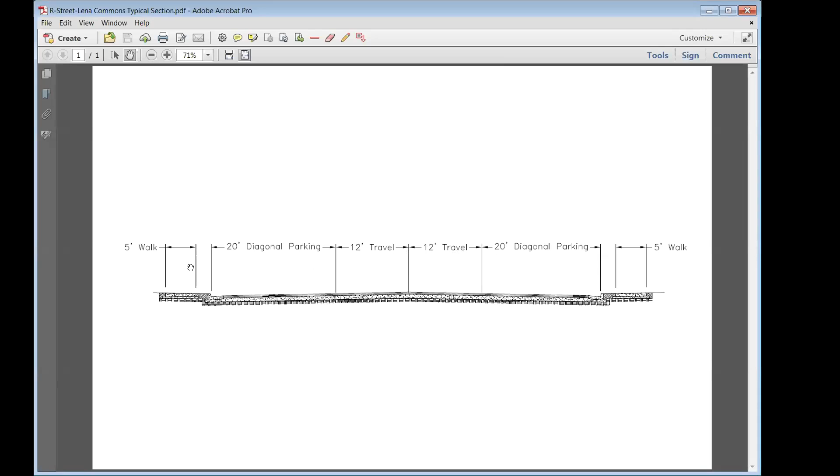Okay, this is an overview of what the cross section will be. The right of way total width is 80 feet. So down the center, we're going to put two travel lanes and then two diagonal parking zones on either side, and then 5-foot walks on the property line or close to the property line on the Lena Commons side.

The back of the sidewalk will be right against the property line. On your side, the west side, there'll be a 1-foot setback for the sidewalk. In other words, the back sidewalk will be 1 foot off of the property line into the town right of way.

This is a drawing, well actually the model I work in, and we'll zoom into it down here at the bottom. It's Charles Street at the south, Fredrick is here, and Otto is towards the north. So it'll be basically two blocks.

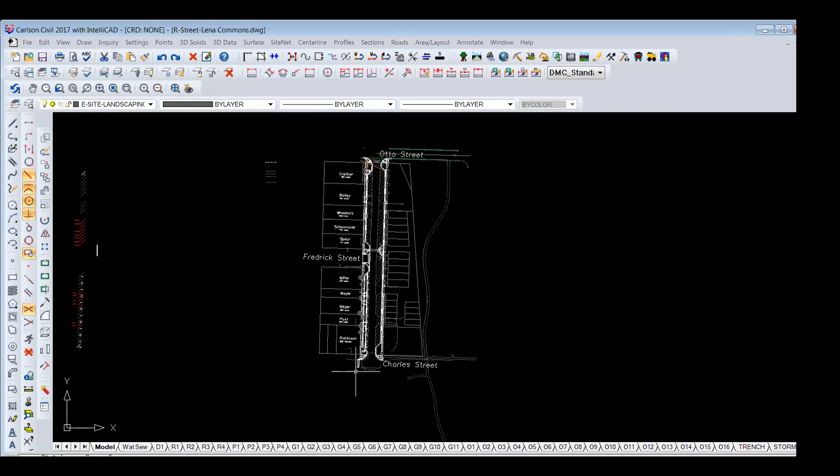Now if we zoom in here -- hey, this is Preston, let me interrupt real quick. Can everyone see the screen first of all?

Let's see some nodding heads if that's true. Ron, I think you really need to speak up, we're having a hard time hearing you. I'll get right in front of the mic, I hope that helps.

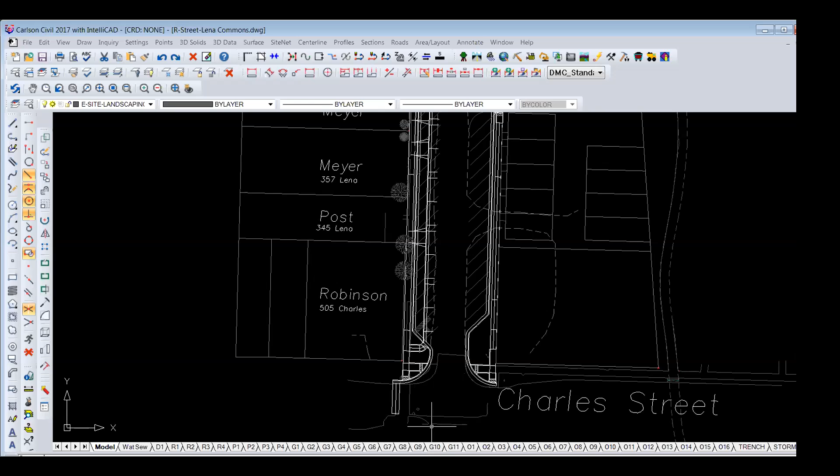This is Charles Street. We're going to replicate what we've done downtown and put bulb outs on all ends of the blocks with the handicapped ADA ramps that approach from either side. This corner over here is the Lena Street Commons.

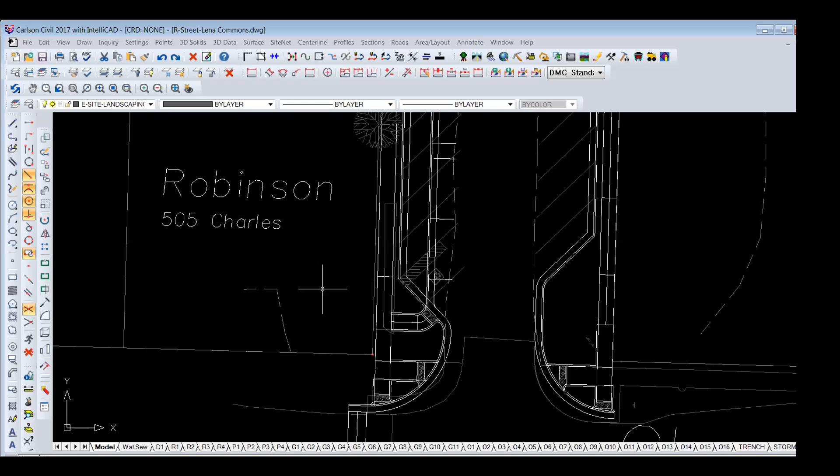This is the vacant lot owned by Robinson. This little gray line here is the existing sidewalk, and that sidewalk will come out, replaced by a new sidewalk lined up with the ADA ramps.

At each end of the westerly block, at Otto and at Charles, we will have 2 handicap parking stalls. For each, there will be a ramp that allows people to get out of the handicap stall and up onto the sidewalk. Diagonal parking continues down the street.

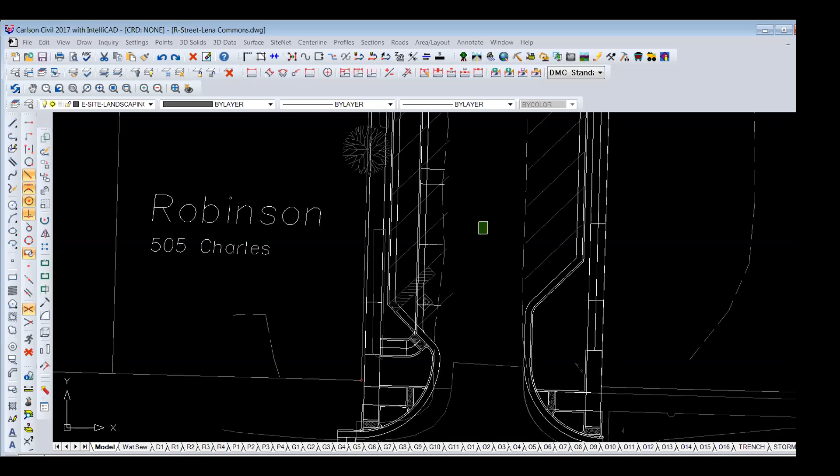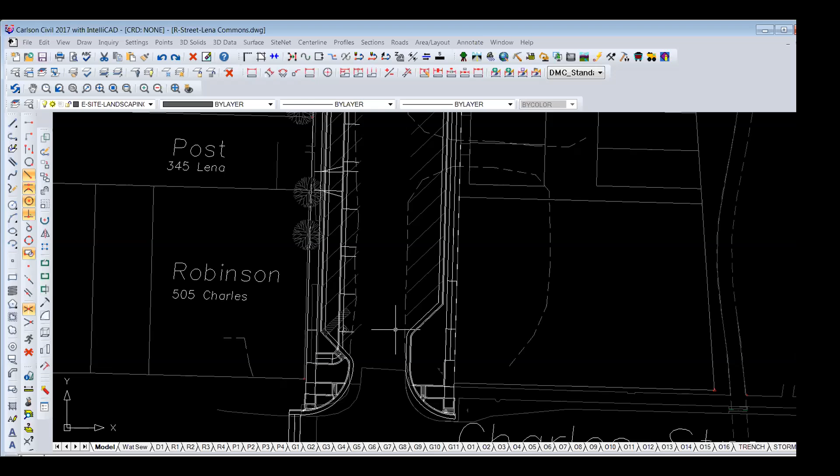On the other side, on Lena Street Commons, the bulb out goes a little bit further. This is to allow a car parked in this stall to back out without backing into the crosswalk area. That's why the bulb outs on this side are longer, to have a safe area for someone using this parking stall to back out without hitting pedestrians.

On Robinson's property there are 2 trees. They're not beautiful, but they are trees. Unfortunately, they're right in the sidewalk area, and if we put the sidewalk in, the roots will lift it. So we'll probably have to remove those 2 trees and do something else there.

Once we get past that, starting on Post's place, there's a large pine tree and another 2 small trees, all right up against the fence, but they're far enough back that we won't need to deal with them.

Same with the Miller property, there's a large tree and a smaller one on either side of the walk that goes into the front door. Both are out of the way enough that they won't be impacted by the project.

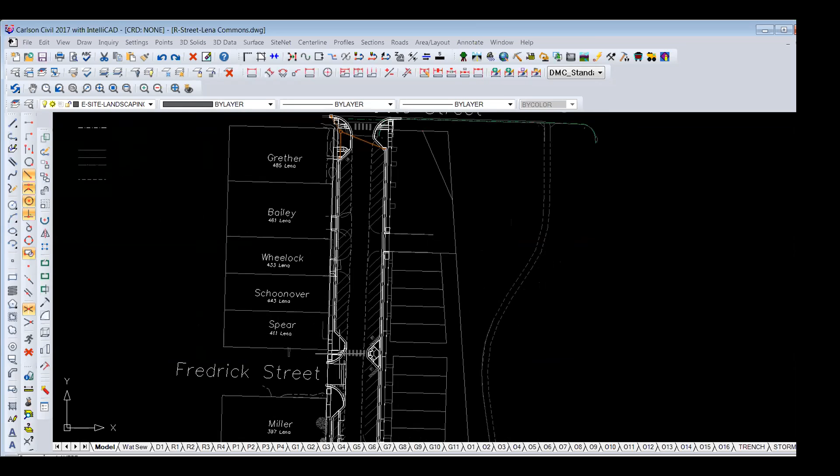Once we get to Lena Street, or Fredrick Street, we reach the Spear property. I'll zoom in a little here. This is the front sidewalk of the Spear property where it comes out into the right of way, about 2 feet. There are 2 bushes on either side of their entry sidewalk that'll have to be trimmed back significantly or removed to accommodate the sidewalk installation.

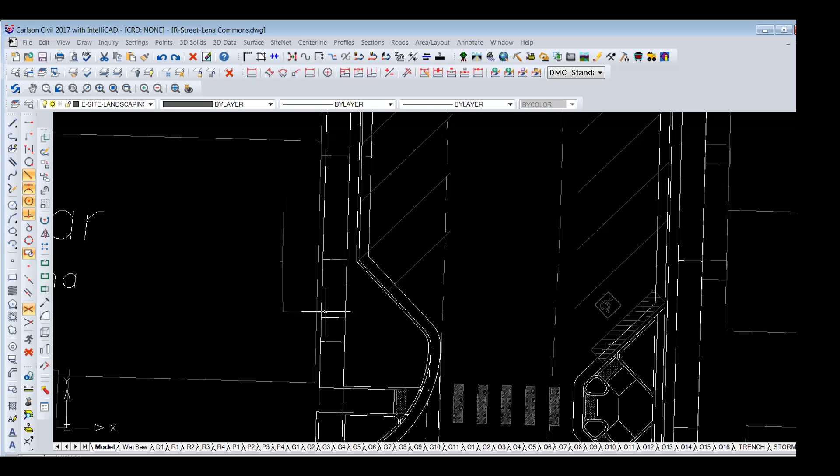Going further north, this is the Schoonover property, and there's no vegetation there. He does have some parking, where he parks the Model A, and on the north end he has a shed, and he does use a parking stall there.

But the fence is close enough to the back of the sidewalk that it doesn't allow sufficient distance. If we leave that as a parking stall, he can't drive in and park completely off the street on his property without partially parking on the sidewalk.

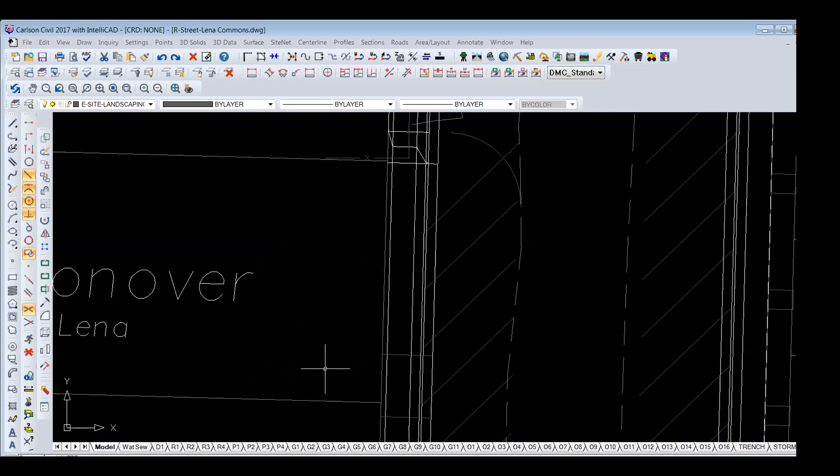Is that a little better? A little closer? Not much. Why don't we take a minute and go back into your control room? Joanne, I don't think we caught what you said. I think you guys need to get much closer to the microphone or just project. If they can blow that screen up too, so it's bigger, that would be great. That whole window, that opened screen doesn't have anything on it. Well, the one behind that one. Yeah.

Maybe what we should do is call. Joanne, Ron, are y'all still there? Yeah, we're trying to make the microphone louder, we're looking for the thing in the control panel. As an alternative, you can always dial in and use audio that way. That's what I was thinking. Okay, yeah.

Well, how are you, Sherry? Oh, we're sitting here waiting. Can't hear you. Oh, sorry, was there you muted? Hi, Ken. How are you? Good, I'm good, thanks.

You can still see out your front window now? A little bit, well, not for long now.

And we're looking at a gray box on the screen. I don't know if you're trying to say again. Does that work? There you go. Yep, there you go. Okay, here we are. All right, sorry about that. Now can you blow up that whole pane there, you've got, enlarge it? Use that little green button. Does that give you any more? That's probably all we're gonna get, yeah.

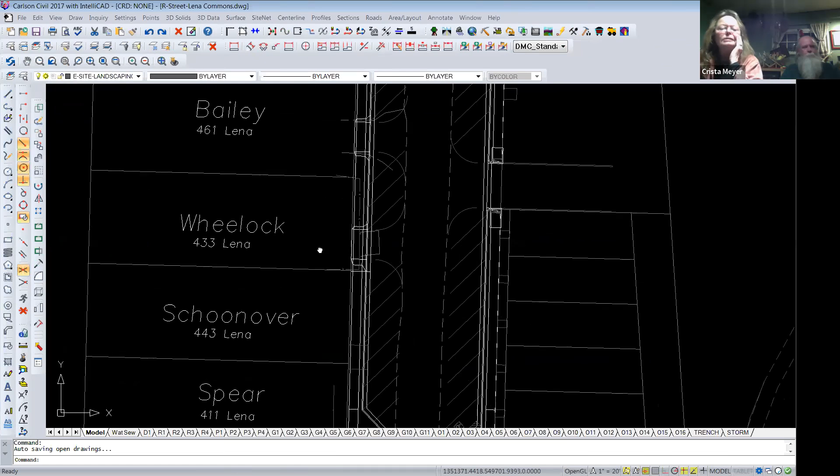Okay, I think we need to go back to the Spear property. Or the Schoonover? They're not on here, but okay, you're gonna have to remove some bushes or something out in front of their house, Sherry. Okay, well, we'll go by Schoonovers.

One of the things to have a driveway cut is that we need sufficient distance behind the back of the sidewalk and into the property that somebody can park a vehicle without the back end sticking back over the sidewalk, so the sidewalk is free for pedestrian travel. So when we laid out where driveway cuts go, one of the things we looked at was whether there's sufficient distance behind the sidewalk that a car can actually park.

The Wheelock property has a steel fence out in front of it, about 4 foot out into the right of way. That fence will have to be moved back to the property line, but they have a driveway that goes back to the house with adequate parking, so we provided for them to have a driveway access cut that crosses the sidewalk to get into it. There's no diagonal parking where that driveway cut is.

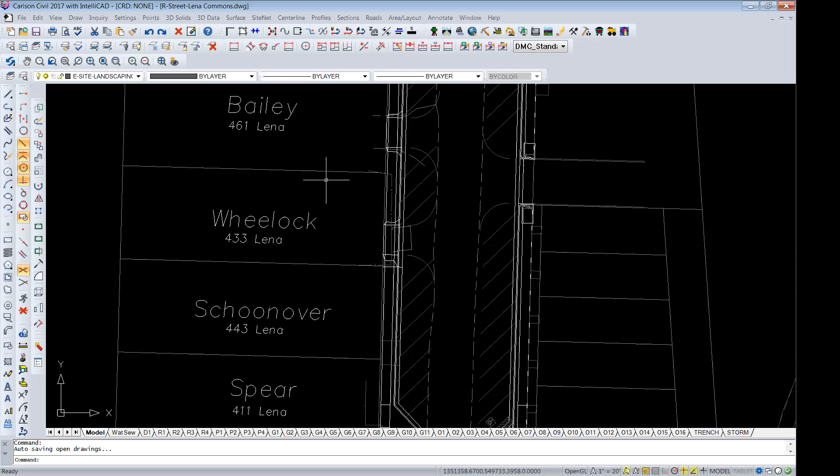For Schoonovers, there wasn't enough depth. They have a fence somewhere about in here. It was only about 14 feet from the back of the sidewalk to where they could park. Most of the parking they're doing now is actually out into the right of way.

On the Bailey property, the driveway is sufficient, so there would be enough area to warrant having a drive-through or a driveway parking and have parking off the street. So that has a curb cut in front of it. It still has some street parking in front of the property, but it does allow for a parking stall for somebody to drive into the parking area on property.

And then the Grether property just put a fence at property line, and all of their improvements are on their own property, so we won't impact that. Again, there'll be an ADA ramp up here at the very north end near Auto, and an ADA ramp that somebody can use to get up onto the sidewalk from the ADA parking.

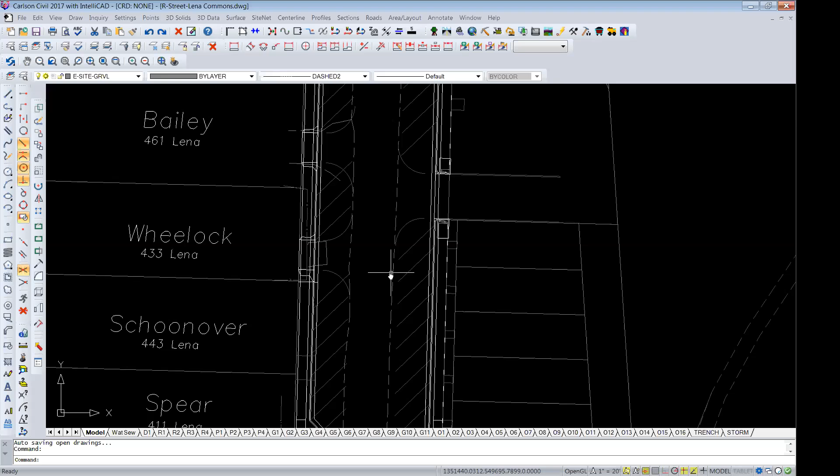So all of these are diagonal parking in front of Lena Commons. There's 6 or 7 on ADA parking, diagonal parking there. 2 diagonal parkings in front of Wheelock. 1, 2, 3, 4 in front of Schoonovers. 3 in front of Spear.

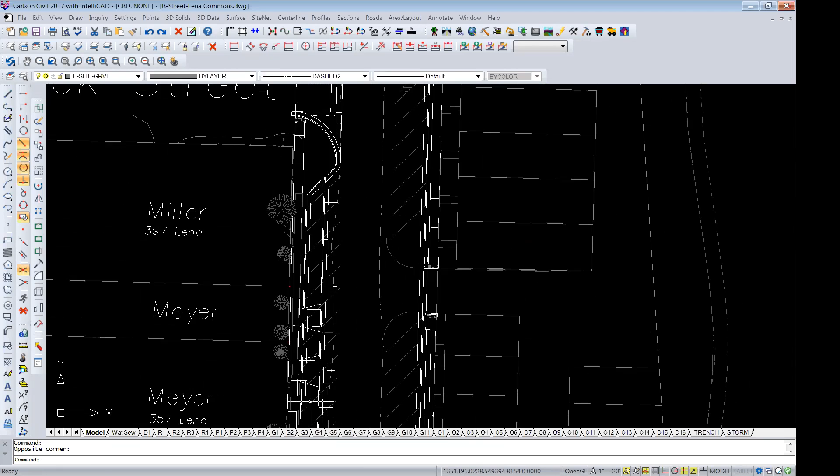Down here in front of Miller, there's 4 on-street parking. Meyer has 1, 2, 3, 4, 5, 6 parking stalls. We need to talk about that. Post has 3 and Robinson has 6. So that's the current design.

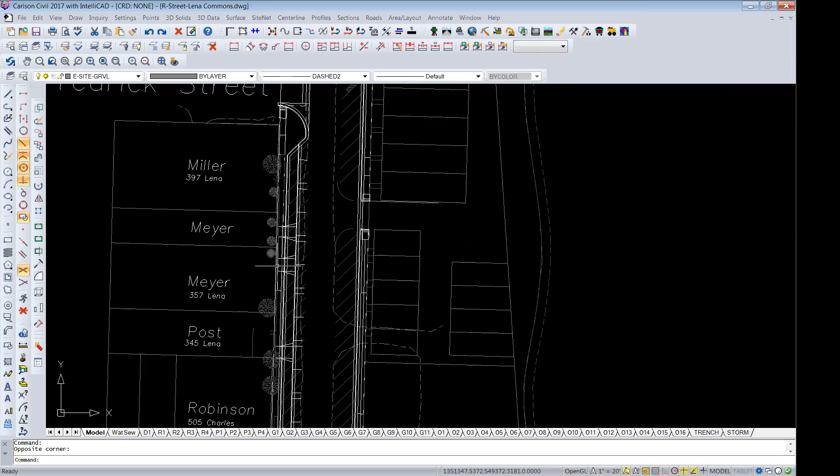On Myers and Posts, when we talked out in the field, you said there was some driveways. On Russ's, there's one into that lot that's split off to the north of the property, north of the house. Then this is the property, the lot with the house on it. And there were wooden gates here next to the tree, in between the walk gate and the pine tree. So I put in, if that goes back far enough that there could be parking on private property, I kind of drew in what a ramp would be.

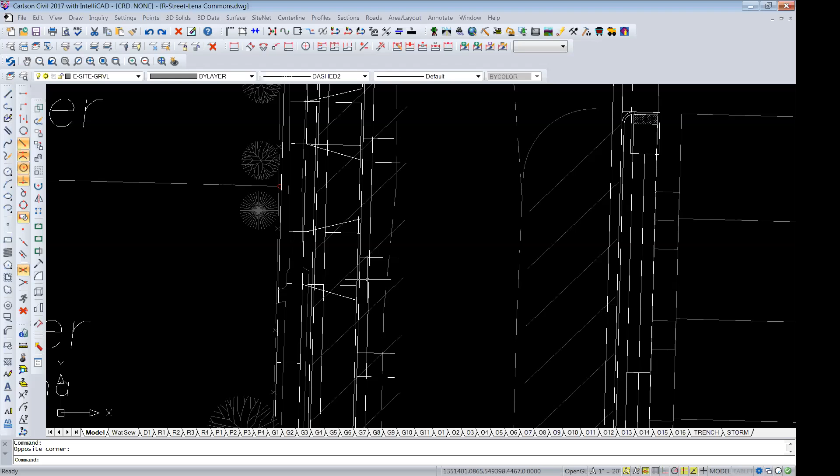To make that work, we would have to move the curb out away from the sidewalk. We'd leave the sidewalk at property line, but I need more distance to make up the elevation between the flow line and the sidewalk to make the grade. So if we put that driveway cut in, we would have to remove the diagonal parking in this block and put in parallel parking. That's what these lines are, parallel parking layout.

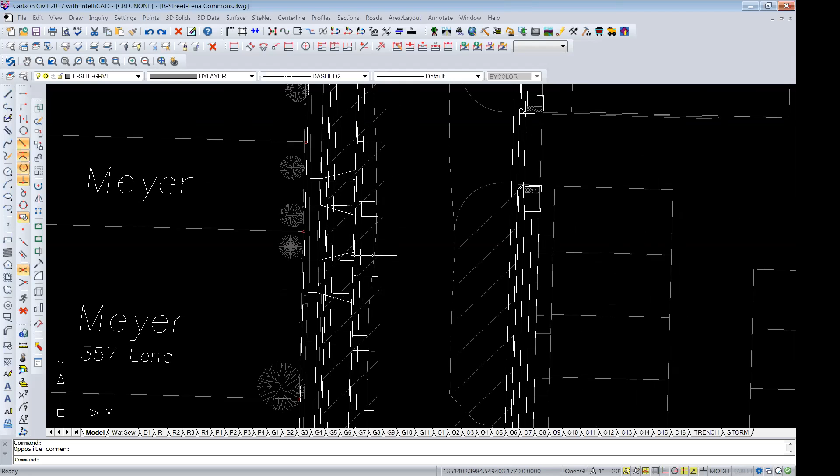But to have this driveway cut, we'd lose 2 parallel parking spots. To have this one, we'd lose another one. So there would be 3 parking stalls of parallel parking lost.

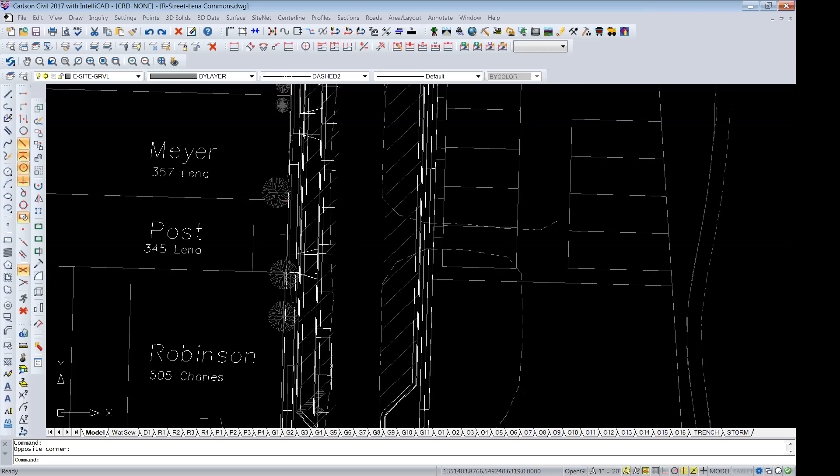And then down at the posts, we would lose 2 parking stalls in front of the post property. So this would be about the only area we could keep: 1 in front of Myers, 3 in front of Robinson, and 2 in front of Miller's.

Let me interject here, if you can hear me. We were never in favor of diagonal parking on our side of the street, because I measured the street and it's no wider than the street at the library, whatever street that is, going east and west. And that street's barely wide enough when you come around the corner, with parallel parking on one side and diagonal on the other, to get two large vehicles through there.

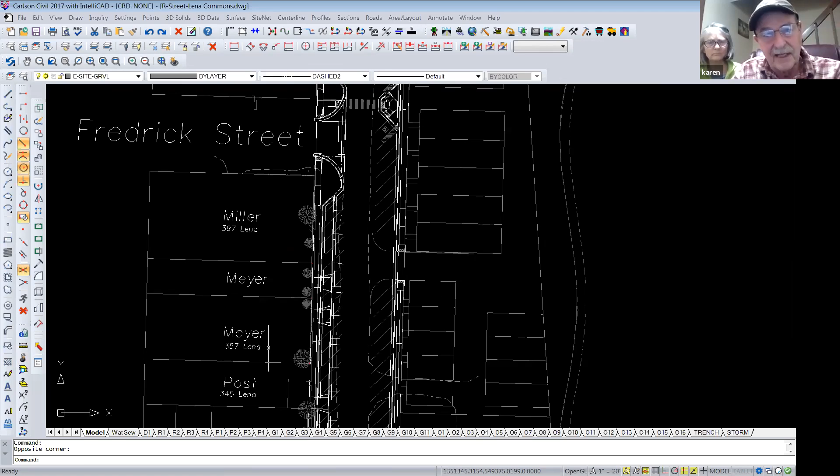Yeah, this is the same thing. The difference, Ken, is that Lena Street is actually an 80-foot right-of-way, and Charles is only 66. Right now, the roadway is only occupying a pretty small percent of what the town right-of-way is. So technically, there is room for diagonal.

One of the directions in 2017-18, when we were designing this, was to try to optimize the parking and to mirror what was on the rest of Lena Street. I think if all of you prefer that block be parallel, that would be something we could ask council about. We've got a 7th council member who can weigh in.

Well, just speaking on our part, I'm in favor of parallel parking on our side of the street, because that's what I'm gonna do when I've got trailers and stuff like that to park there. I can't park diagonally. Frequently I park a horse trailer out there, or a fifth wheel temporarily.

Is that bulb-out going to affect you for parking that trailer, that bulb-out up at the north end? It's in the way.

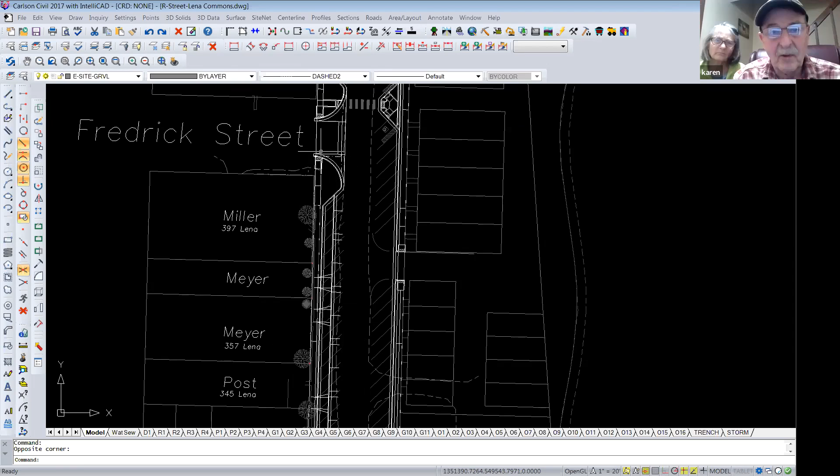Well, the bulb-out needs to be there to protect the ADA approach ramps and to make the drainage work across the street. The bulb-outs are designed to shorten the distance where people cross the street, so that they're only walking across the 2 travel lanes and not across the parking and travel lanes. That's why we have bulb-outs in the project, is to shorten the distance for pedestrians to cross the street.

Yeah, and they just make it a pain in the butt to safely get around, to turn left when you've got a big trailer or a truck, to get around those on the street.

We widened these out to 20-foot radiuses and actually put 14 feet between the lip of gutter and lip of gutter. I did that intentionally, just in case somebody did get into this area with a trailer, so they can get around the corner. If we tighten these radiuses up on the fillets to 5 foot or 10 foot or something like that, that would restrict turning, and you couldn't get a horse trailer or anything around this corner.

But the object of the bulb-outs is to bring the drainage out where it can cross at the bulb-out on the north side, and then to have the bulb-out go out far enough that pedestrians are only walking across the 2 drive lanes to get across.

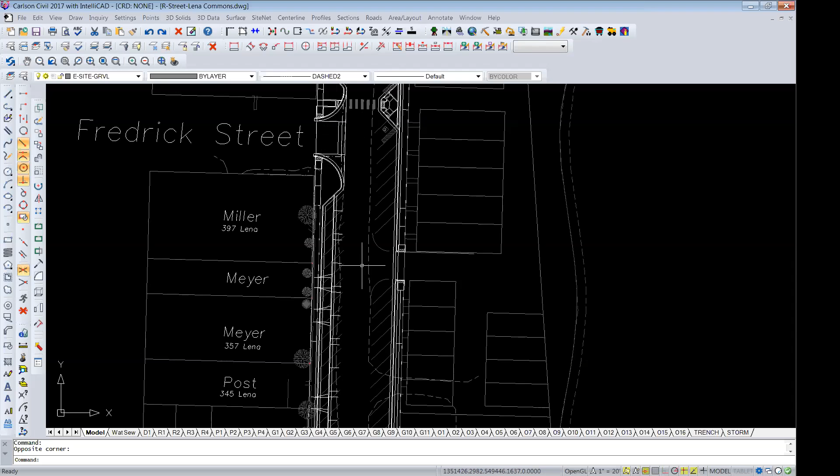Well, everybody just uses the street for a sidewalk now anyway, so it really wouldn't matter.

Well, that's part of the intent of this too, is to make it so that we have a pedestrian walkway that is not out in the street. And anytime you're putting in pedestrian sidewalks, lining them out and making them ADA accessible, the intent is to get people to where they're actually walking on the sidewalk and not using the street.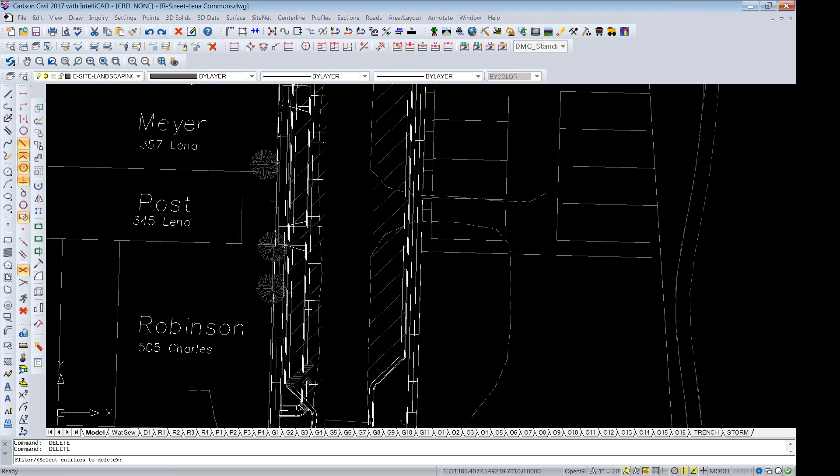I missed something when you were coming by. This is Ken Meyer coming by our house on the bushes and the trees. Are they out of the way from your sidewalk? They're far enough back. This is your walk going into the house, right over here. Maybe I can zoom in just a little bit closer.

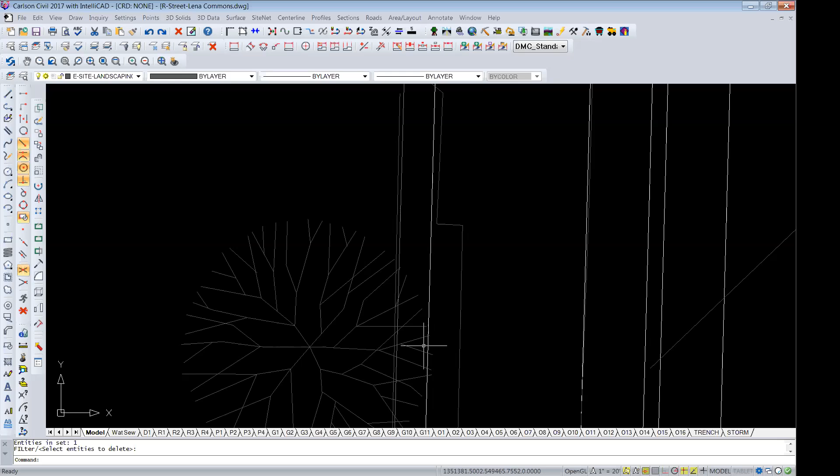This is the big tree to the north of the walk, and this is the smaller tree south of the walk. When you look at the center of this, the trunk is probably on the smaller tree, maybe a 2-foot diameter, and that's still close to 3 feet away from the back of the sidewalk. Here's the existing back of sidewalk now, this gray line on this side. So we're moving it back a couple inches right at your walkway.

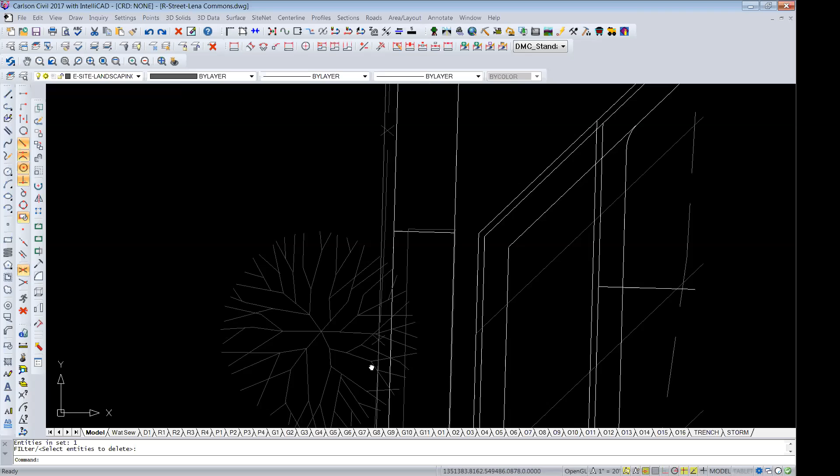So is our fence on there too? Yes, that's this line right here. And it's pretty close to the right-of-way line until you get towards the north end. This would be your fence corner. This line right here is your property line, and this is your fence corner.

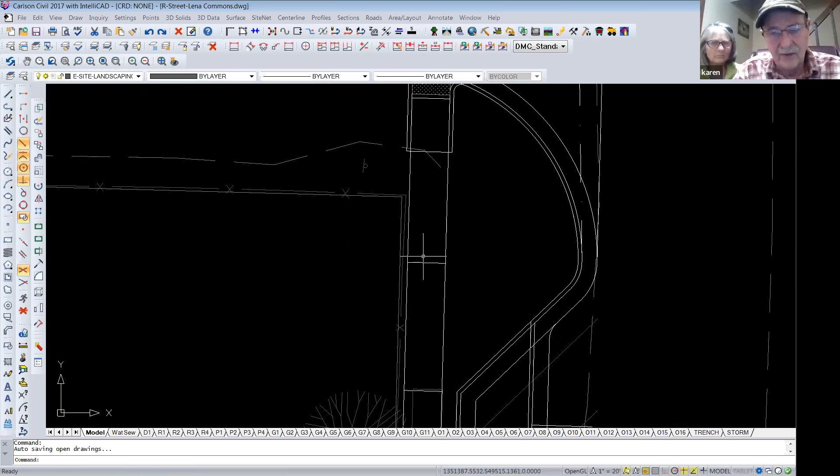And this is one of the reasons I moved it. Instead of having the back walk right on the property line, I moved it out a foot, so that we would not be getting into the fences. Okay, so do I have to move that fence or not? No. Okay, that's what I was wondering. It's been there for 80 years.

No. So, your Russ's fence, this is the big tree on the south end. This is the property corner in the fence, right in the fence corner. And it goes up, in fact all your property pins are right about in the fence corner. Here's the one, the new one that was set, that split the property. And then here's the one between Russ and Ken's. Right.

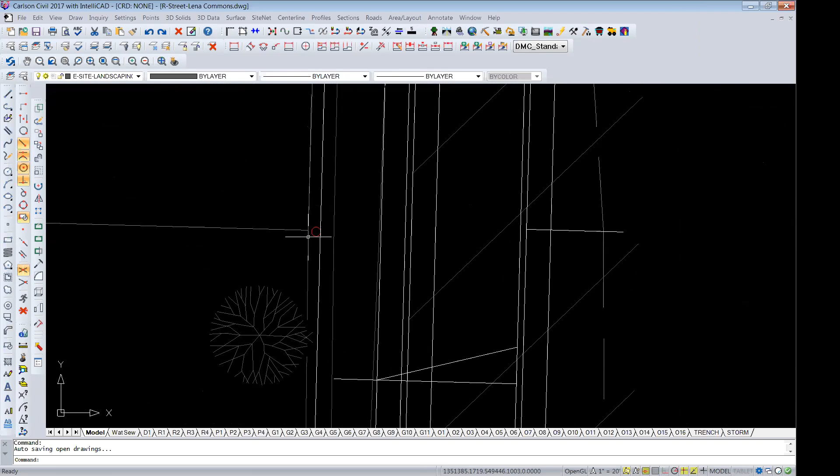And the fence is inside of that one. So, no, we don't have to move fences. The only thing we've got, the one fence that really protrudes is Wheelock's, and that's that tall metal fence that comes out and has a metal gate and then goes back in. And this is about 4 feet that it's sticking out into the right of way.

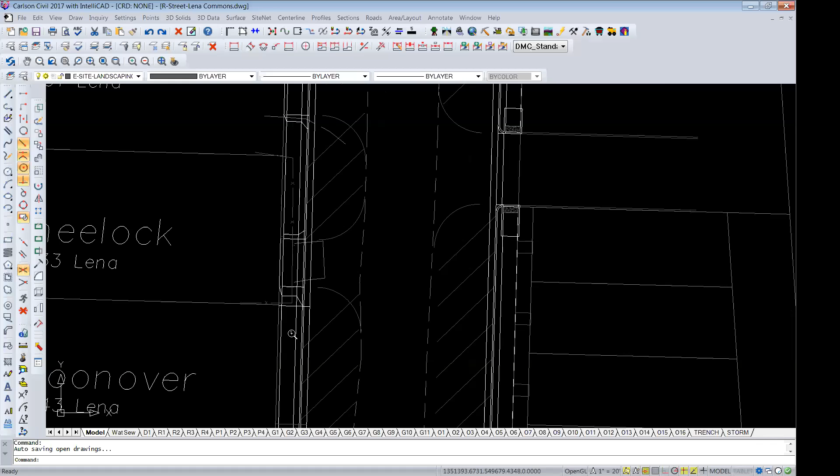I have a question about the Spear property, Cherie and Jim. They're not here, but they were talking about having a driveway to the far north of their property where they pull in a vehicle from time to time. Was that taken into account?

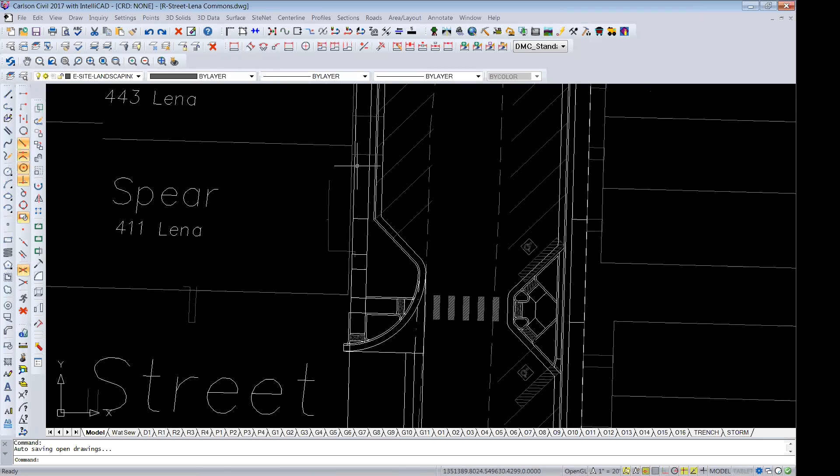Well, I talked with them out in the field. This here is their house. So they only have about 6 or 7 feet from their house to the back, well, about 6 feet from the right-of-way line back to their house. So they wouldn't have enough distance to park a car off of the street.

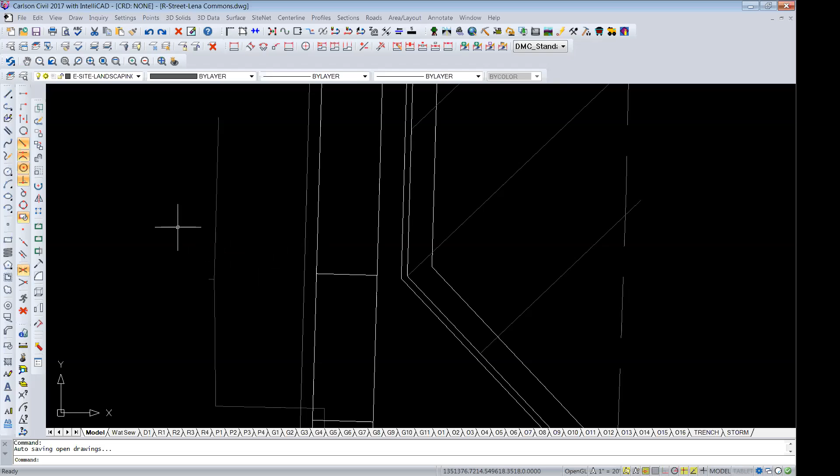I see. Okay, if they used it as a driveway, they'd be parking with the back of the car out here in the parking area. They would be crossing the sidewalk and still stop short of the house. So that didn't really give them any

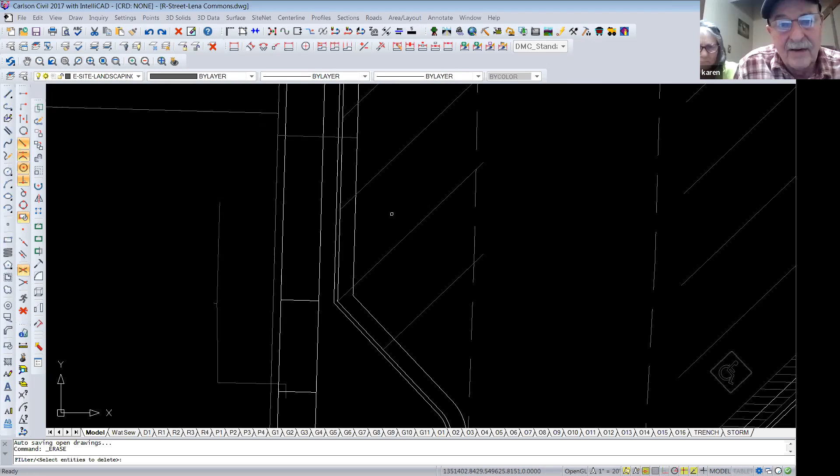availability, you might say, to have a parking or driveway cut. I think what he was more interested in was backing in over there to unload wood, because his wood shed's on the north side of the house, and he didn't want to have to back across the curb to do that. That I don't think we'd have a problem with, him backing up over the curb to unload, because he stacks his wood right over in here somewhere along this side.

And again, we have to maintain our ADA ramp or bulb-out to meet the requirements of the ADA constraints at the intersection.

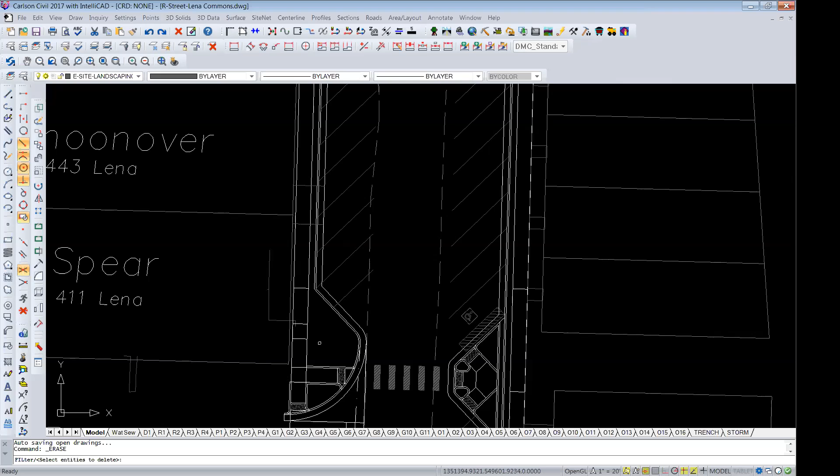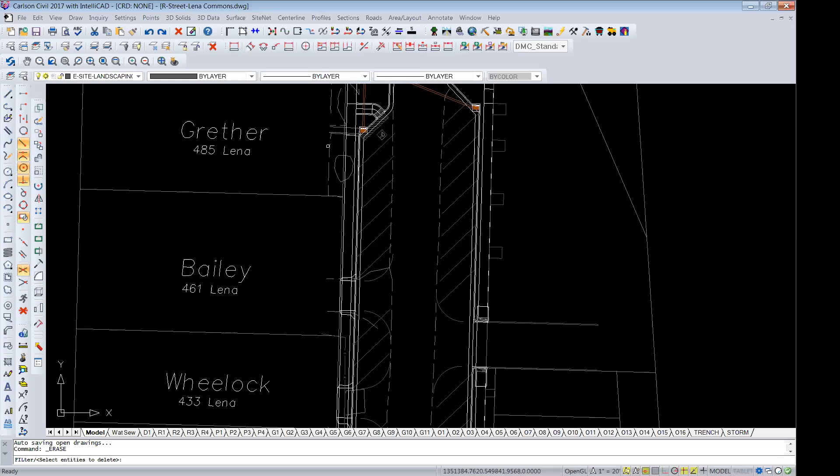Can I ask a question? About how much property are you taking from us, feet-wise, based on how the line is now? I'm Bailey, so I'm up the next property, and I know you talked about it. Okay, the Grethers just put in a fence in front of their place, and they set a pin right here at their property line.

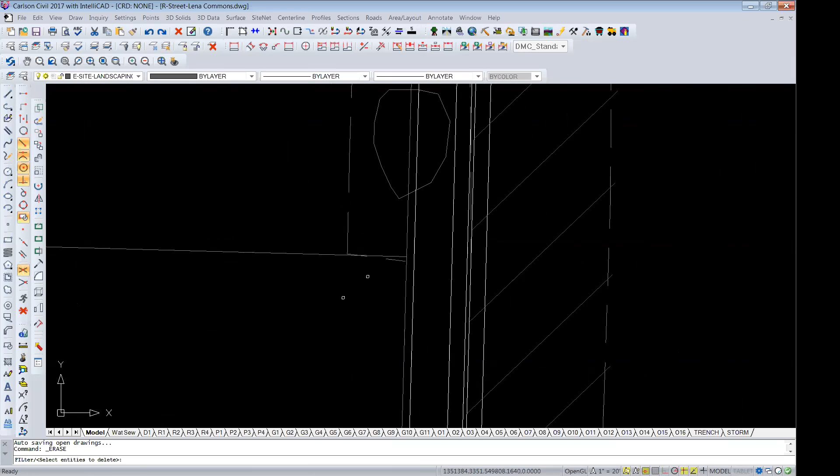And so their fence is just basically right on the front right-of-way line where it goes north. Okay, if that gives you an idea where that's at. Yes, I can use that. We're just using more of our right of way, not taking any new right of way.

And then the property directly across the street from me, which is now a vacant lot - are units going in there as well? Right now they're using it for storage.

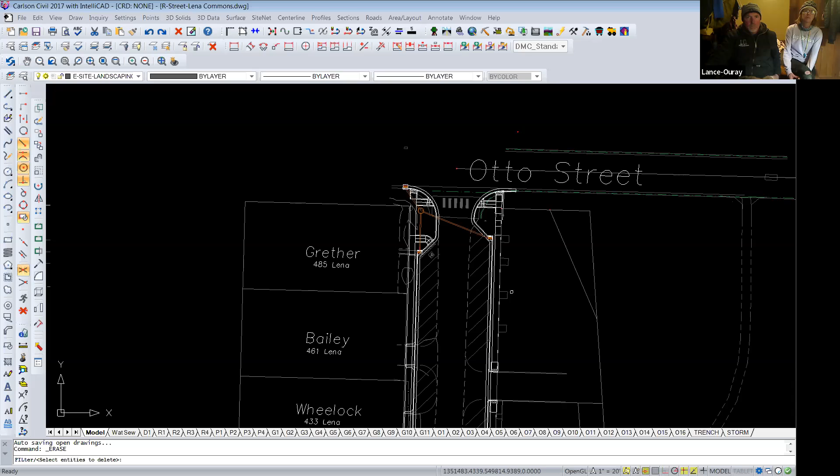Yes, this area right here, they have 4 units going in. They're small commercial units, one story. Those are the commercial, the A unit, single story. And they have very little plumbing, so they can't do a whole lot - I think there's one 1-inch tap for all 4 units.

Hey Ron, this is Lance, we're at the Post property. It looked like you had the driveway in there for us - I just wanted to confirm that.

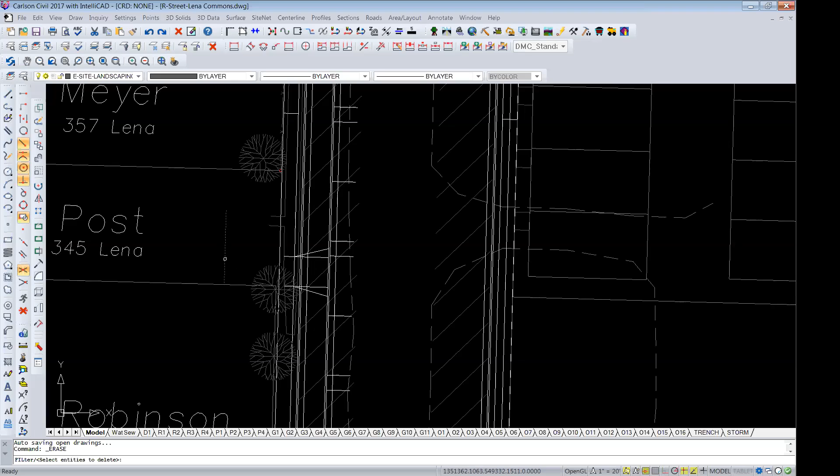The house is right here, that's what this line is. And there isn't enough distance between the back of the walk, which is right here, and the fence line. So I drew one in here, but you'd have to do something - what used to be an old carport would have to be opened up so that you could actually park in it, because there isn't enough distance between the front of what was the carport and the back of the walk.

Right on the sidewalk right now there's a driveway cut. And the carport - I actually pull a motorcycle in there, and I could also pull a Jeep in there. I own a Jeep and a motorcycle and would like to have access off the street to pull it in.

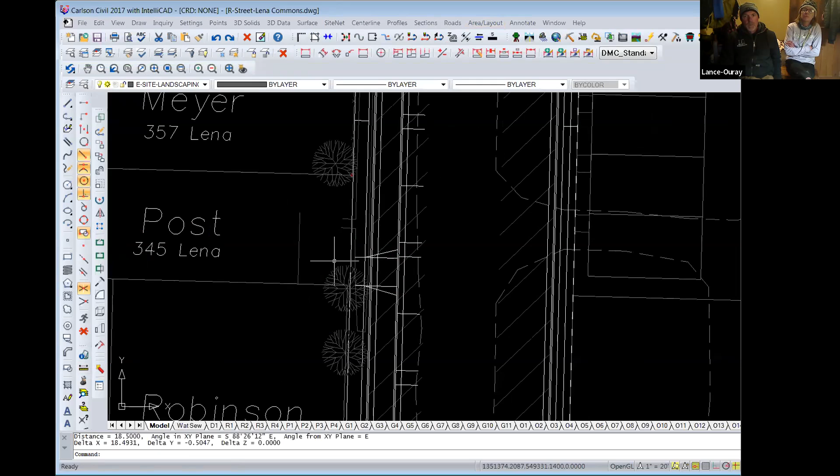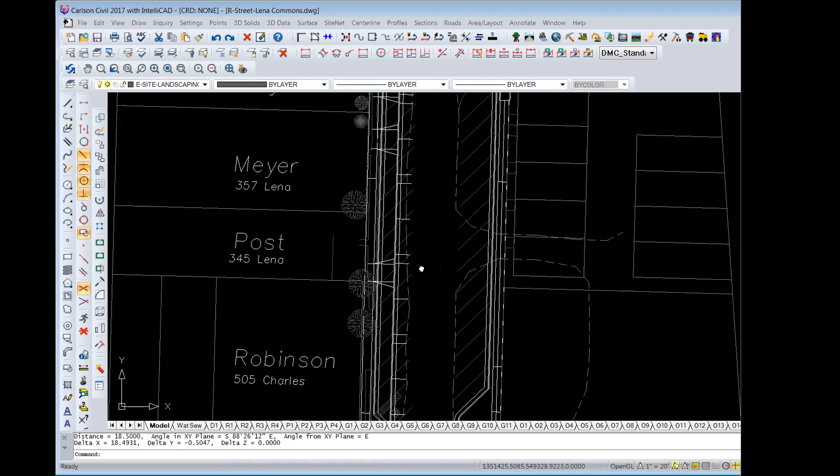Russ, do you want to hazard a guess about how council would feel about that? I would have no guess. I know personally how I would feel about it, but I'm not going to speak for council.

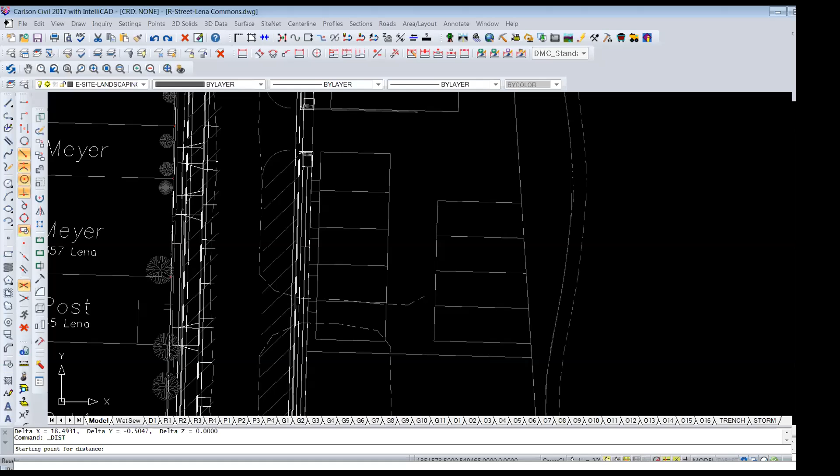Good move - what would everybody else like to see in there, parallel or diagonal? That's a good question, Ken. I think what I'm hearing is you would prefer the parallel. I think I would - I think Lance and Bobby Joe would too. So at least on the southern block, I'm pretty certain we'd all like the parallel.

This was guidance from quite a few years ago. Lena Street is the only street in town that has an 80-foot right-of-way, so it's the only one in the downtown area that lends itself to putting in diagonal parking. On the smaller streets, the 66-foot right-of-way, we have put in some diagonal - it's awful tight, and they've only put it in on one side. So the direction from council way back when was to try to use this, because we only have one street in town that's 80-foot wide that would accommodate more parking, and to use that right-of-way for that purpose.

Is it 80-foot wide up there by the True Grit also in the park? Yes, it's 80 foot the full length, until you get down to Chipeta - that's where the diagonal parking is, off the highway coming in by the True Grit. That's the most dangerous place in town. Yeah, you come in and people are backing into you all the time.

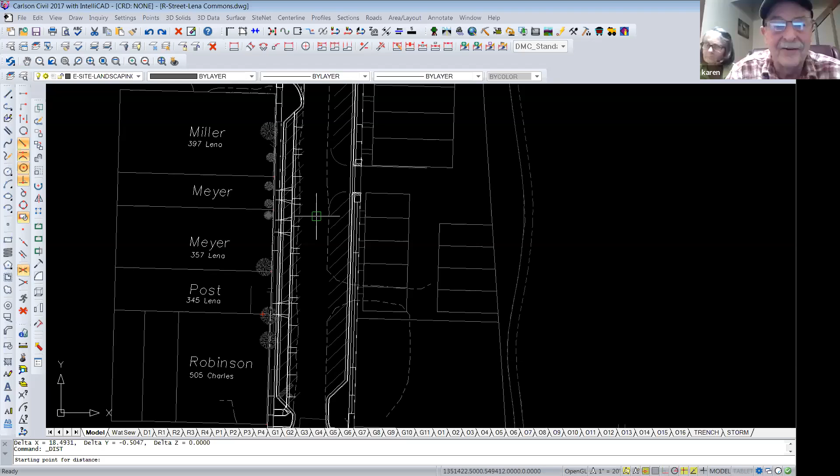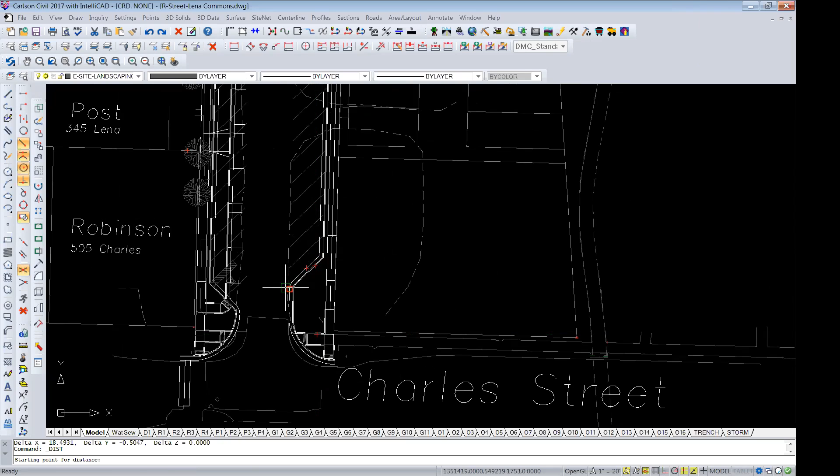I think one of the things they didn't do is what we did on these - where you put the parking, you use the full side of the street, and part of making the bulb-outs not asymmetrical is so that if somebody does park out, they don't back up into the lane of traffic. That's a problem they have down there. The other thing is they wanted more sidewalk when they did that project, so they narrowed up the travel lanes to allow for the diagonal parking.

And right now we're looking at 5-foot sidewalks in this block, and I think they have 16 in front of the True Grit.

Part of that is because in that block, with it being so commercial, they widened the sidewalk, and the only way they could make the wide sidewalks and still have diagonal parking was to narrow up the travel lanes here in the middle, because we're using the travel lanes for part of the distance for people to back out of parking stalls and not get over into the opposite travel lane.

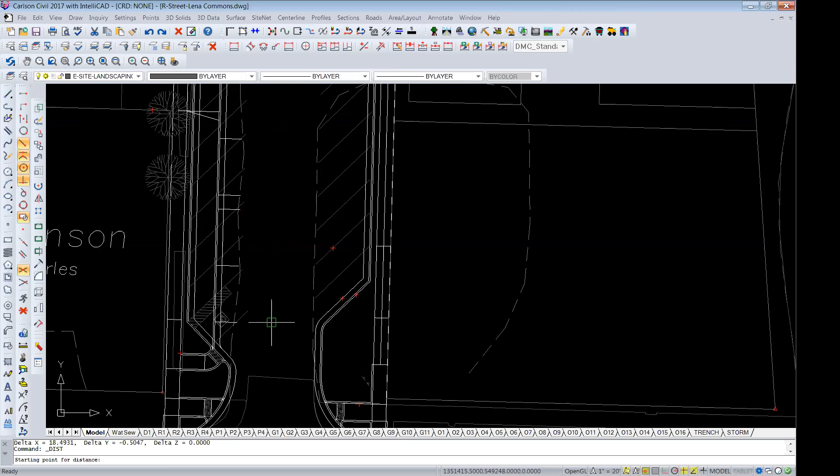Downtown where it's so tight, when people back out, because this distance from here to here in the travel lane is so close, they actually end up driving over into the other travel lane the wrong way to get out of a parking stall. And that creates a lot of the problems down there.

Yeah, it's just too busy, even though it's one way. The extra width on the sidewalks on both sides and how much traffic there is, it's just too difficult.

But I think we're hearing that you want parallel parking on that block, and that we should put the driveway cuts in, is your preference. That's what I'm hearing. Yep, I don't need any driveways. I used to have one there, but I don't anymore.

Have y'all talked to Schoonover then? What I was hearing was that they don't get any driveway cut at all.

Well, they would have to modify their property so that there would be enough room off into their property to park a car.

You're saying the house is, I think what he's saying is there's a fence line on the east side of the property that doesn't allow them a full vehicle between the fence and the sidewalk.

Correct. I think on the north end of the property though, there is a fence, but there may be a gate or something, because there's a truck that sits in front of the house there on that very north end of the property.

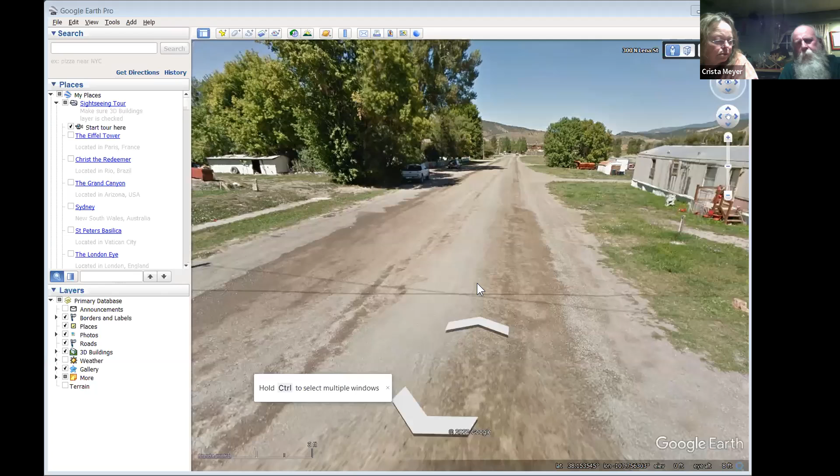New share. Let me do a new share and see if I can. We got your Google map, Google Earth up, so we're seeing that.

Okay, all right, let me drive up the street here, not get everybody seasick. Good luck. Look away for a minute. He's looking like a pretty good driver.

Now, this was in 2012, but the right-of-way line, if I can pan around over here. Well, let me start right here in front of this house. See where my little arrow is, that's the end of their sidewalk. Another 2 feet back of the end of their sidewalk is the right-of-way.

So it goes through these logs, through these logs, and there was only about 12 feet of distance between their fence and here. Now, currently, he has a shed right here where this sign is. There's a Tuff Shed. And then he parks his Model A right in front of the gate.

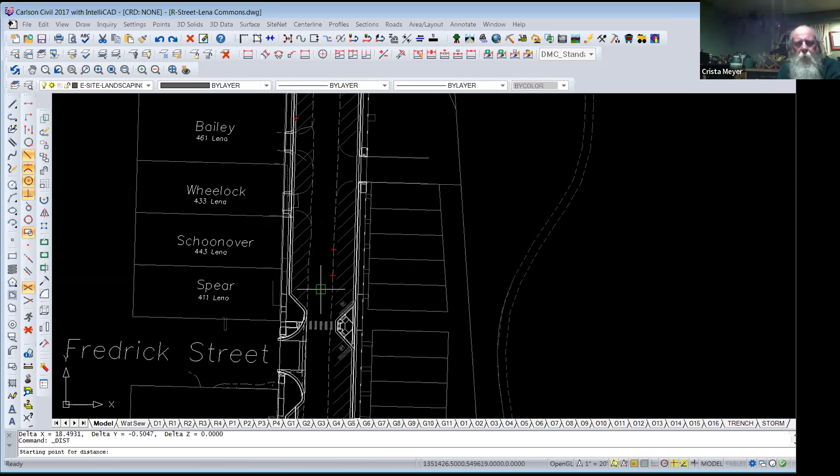I'd like to try and clarify, because if I recall correctly there's a Tuff Shed, but there's a truck on that north side of the property that sits out in front of the house. I'm thinking there may actually be a gate or something they're using, and I want to clarify with them, because they're a little preoccupied with some health issues at the moment. I would like to ensure we clarify that with them. We'll get Preston a copy of this drawing, this piece of the drawing, and have him get it over to you, Russ. Awesome, thank you.

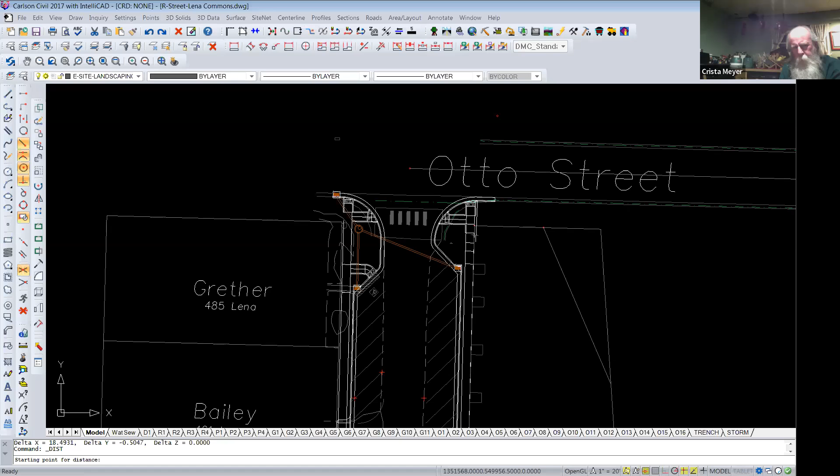What I could probably do is a drawing of each parcel, in front of each parcel. Ron's talking about maybe just doing a drawing for each of the parcels you want, a blow up of their area. So we could do Schoonover's, and if somebody else wants one, we could do theirs. I think it'd be good to have one for the Spears as well. Oh yeah, okay.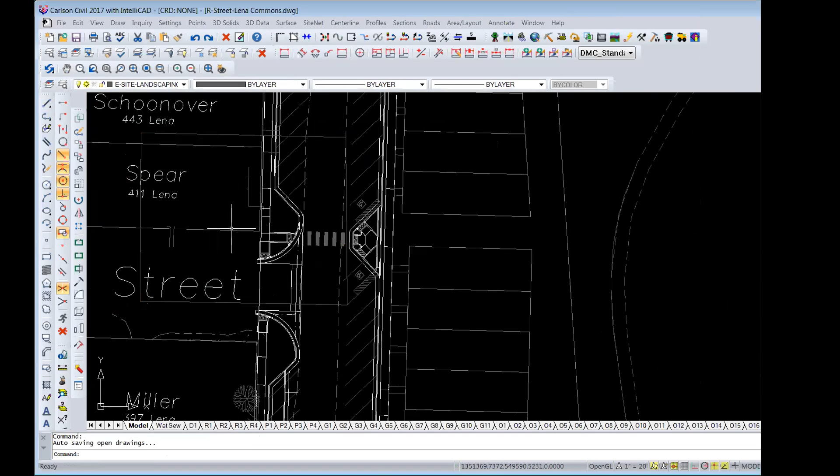What we could do is I could do a picture of something like that for the Spears. A blow up of something like that that would give them enough information to see what it's doing, and then do one of those for each of the lots. Yeah, I think those are the two that are in question. Yeah, that's what I'm hearing right now. Okay, yep, we can do that. Fantastic.

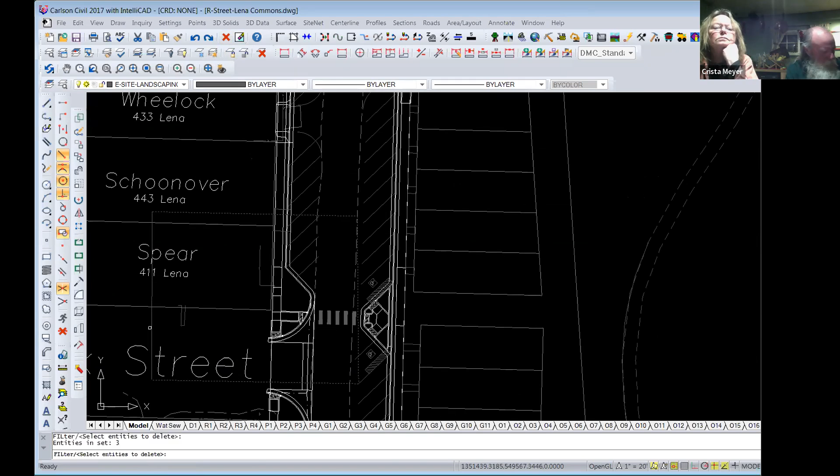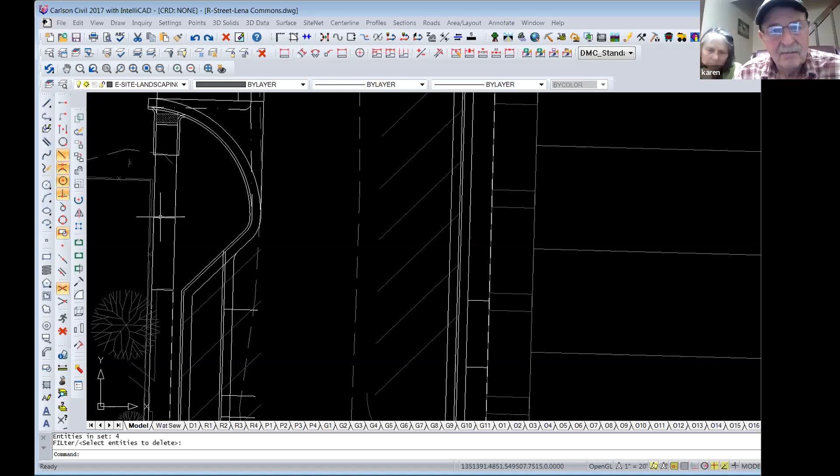So beside the fence, our fences will be a potting or flower bed, then the sidewalk, then the curb, or is it the other way around? There won't be much room between the fence and the sidewalk, maybe a half a foot at best. But there will be room for potting here on the bulb out. And then this, between the sidewalk and the back sidewalk, if there's diagonal parking, is only 2 feet.

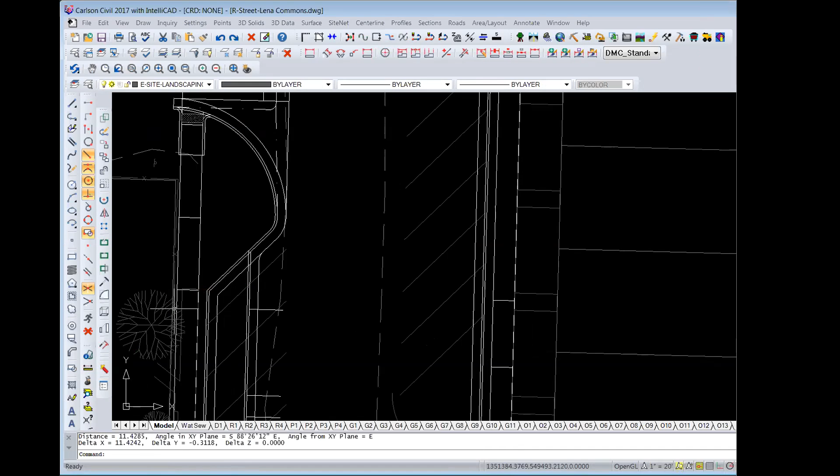If we do parallel parking, the distance in there and the back of the walk is 11.5 feet. So there'll be a pretty decent landscape space there. With the parallel parking, does the town take care of all that stuff?

In the big bulge out place and the planters, does the town take care of those, or are we responsible for those? It's like the snow shoveling, they'll take care of it. They'll shovel the sidewalks and water the plants.

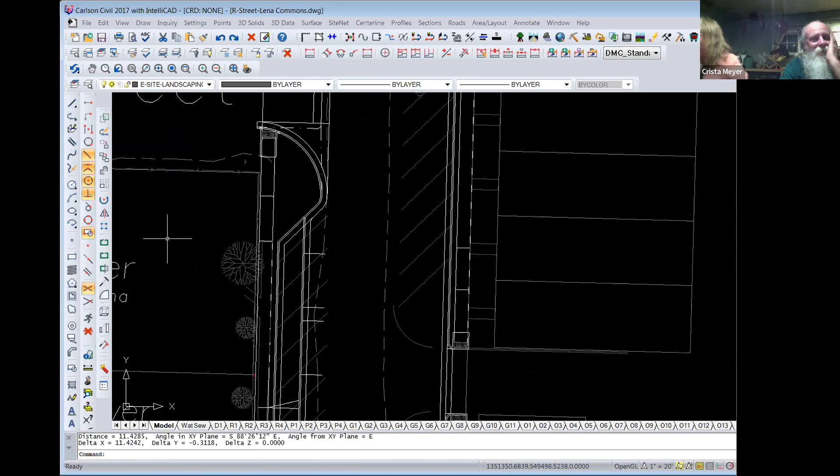The plan is to put irrigation into the bulb outs. And if there's a big landscape space that results from going to parallel parking, we could look at that. Because of the partnership, I'm not quite sure how, they were pretty picky about how much of the beautification they felt like they should have to share. So the budget doesn't have anything for landscaping that space, but it'll be less asphalt, so maybe there'd be enough that on the town side we could do something.

I'll always ask Ken about that. I think your question was about who would be responsible for potential landscaping, and that would not be on the individual property owners. Is that what your question was? That was, yeah, that's part of it, and upkeep. Right, that would be the town. Okay, just wondered. Thank you.

We've lived here almost 46 years, and when we came there were 300 people in town and we were under water restrictions then. The town has grown considerably since then, and I'm pretty sure we don't have enough water for everybody, so I'm wondering about this.

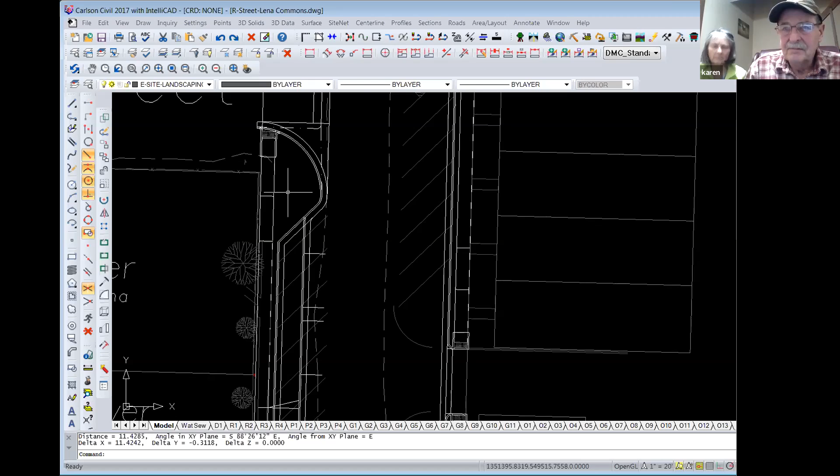Sherry, we can email those to you. I'm just thinking out loud here, Joanne, Ron, help me out, but I think Joanne and Ron can send them my way and I can share them with all of you if that works. Yeah, that works great. That would be great, thank you.

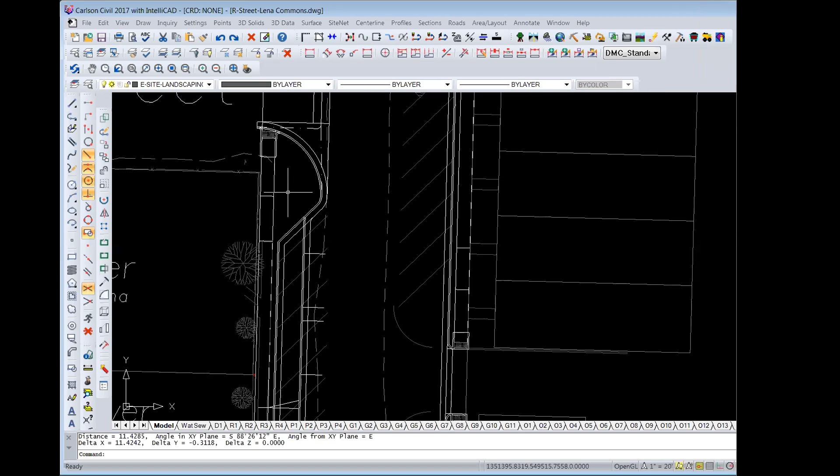Sherry, did you want one of yours as well, or just the Schoonover and Spear property? I would appreciate one myself if that's not too much trouble. I think what I was going to do is one for each one, regardless. And then I'll just make a drawing of each one and we'll give that to Preston and he can email it to them.

All right, and if we have any additional, we can do that. Go ahead, Sherry. If we have any additional feedback that we want to submit later, is that still would be considered?

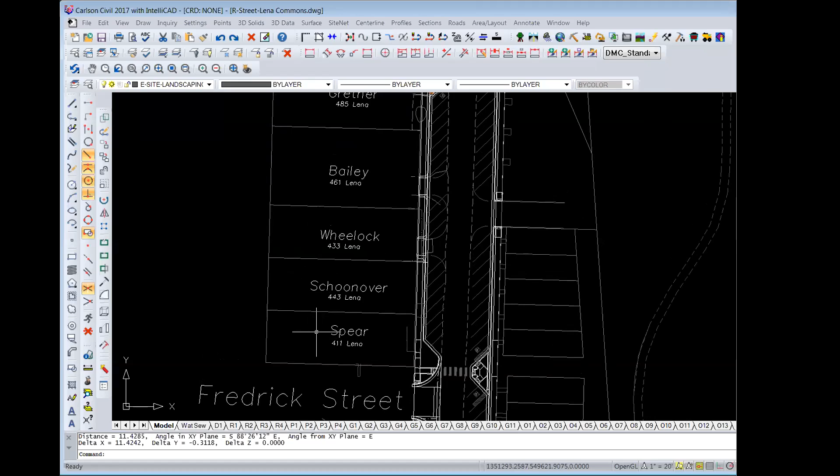We'd ask to have all of the feedback by the 20th if we could, so that we can finalize the drawings to get them out to bid. Like in 3 days. Yeah, right.

Okay, if that doesn't work, I guess let us know, and if we can get most of it, we can kind of keep working. But the more we can have by the weekend, the closer we can get to getting this out to bid by the end of the month.

Well, I don't think I'll have anything else. Yeah, thank you again. Well, thanks for meeting with us and letting us know. Thank you all, really. You're welcome. Really appreciate the time.

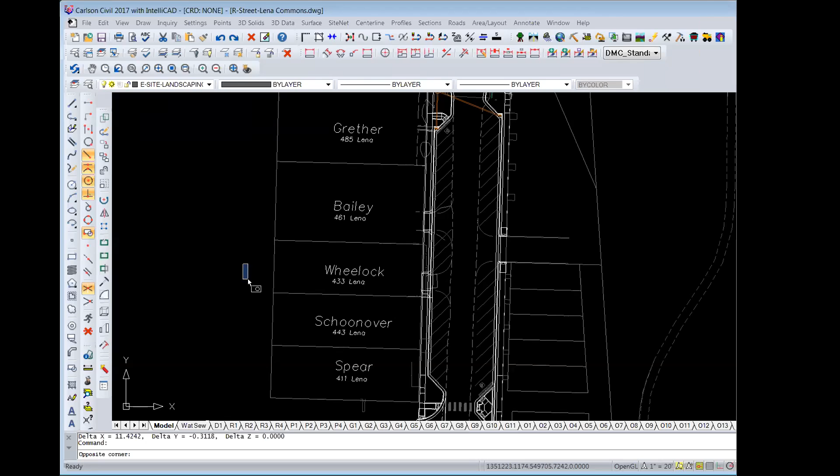And it's nice to see neighbors out on the street. Yeah, Preston, one of these days we really want to see your mug up there instead of just this black screen. I think you're making that up, Krista. No, I think that's why people don't recognize you when you're walking around town, because you don't want people to know who you are, do you? I don't blame you. Yeah, it's called being strategic.

Trying to keep a low profile. Thanks, everyone, thank you very much. And y'all give us a shout if you have any questions, concerns, whatever. But I think this was really productive and a lot of thoughtful comments and considerations here.

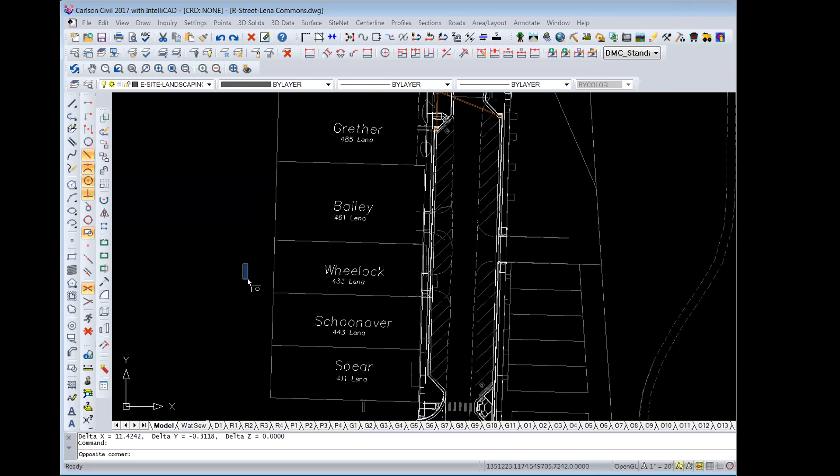Thank you, we appreciate it. We just want to keep an eye out for Schoonovers and everyone who's Spears, people that are not available right now because they've all got a lot going on. Totally, and appreciate that, and good on you all to look out for your neighbors, and sure you will be reaching out to them individually to talk this through. Yeah, we'll let them know. That would be good, thank you.